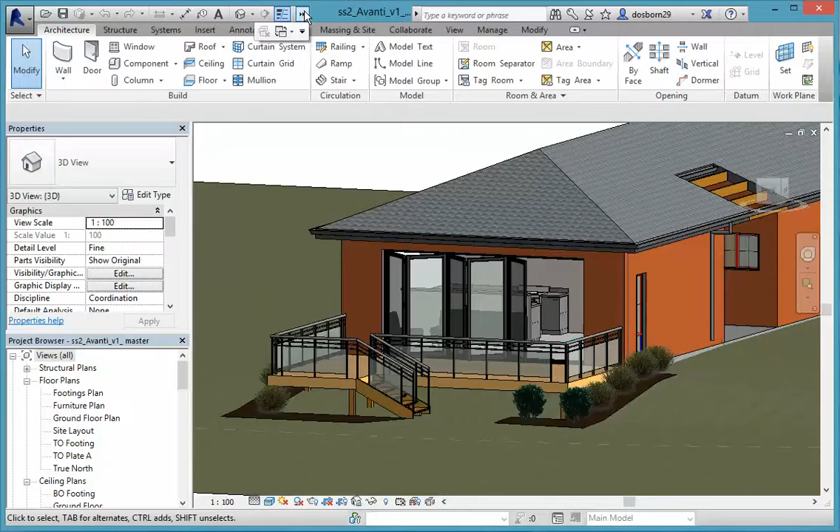Okay, let's go over to our original drawing.

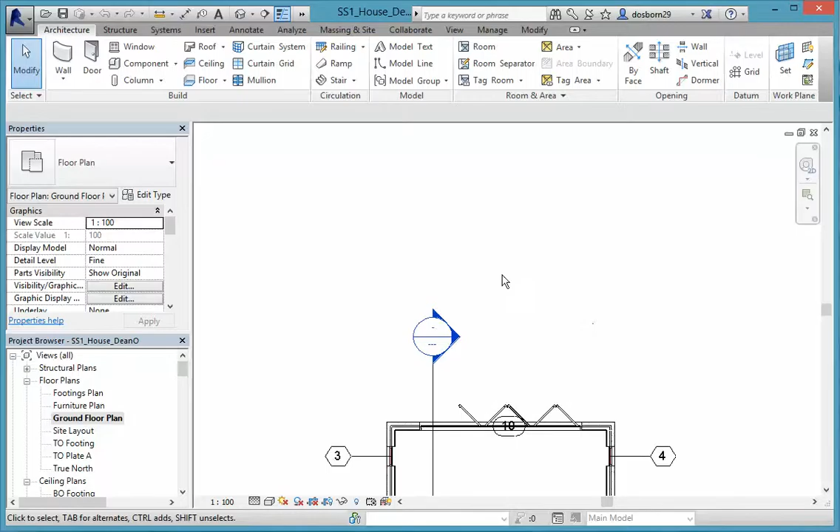First thing we're going to do is put in our floor. Come into our ground floor plan. I'm going to zoom in on the area of the house that we're going to put it into. You'll need to have your drawings out from the original or the finished house so that you can get your measurements off of there. The decking itself is exactly like putting in a floor.

So I'm coming over to floor, selecting floor, pull down, and there should be one there called decking wood finish. Just make sure your level is ground floor and there's no offset. You notice we have the modify and create floor boundary as usual.

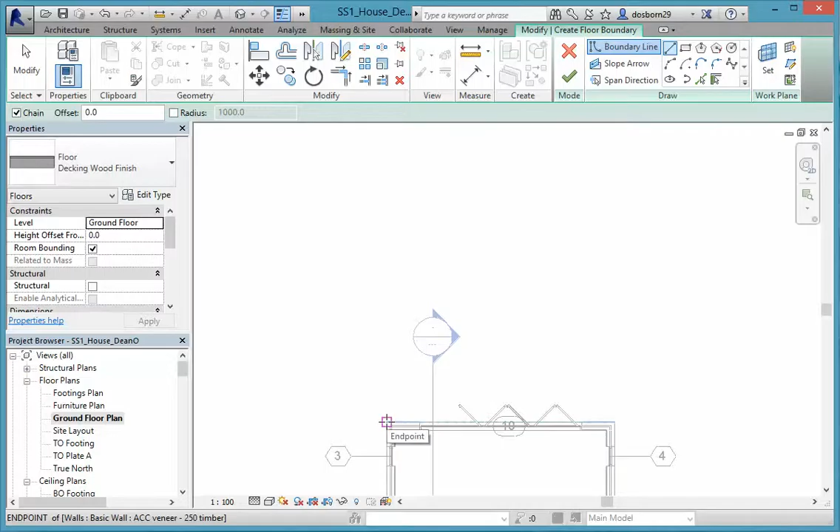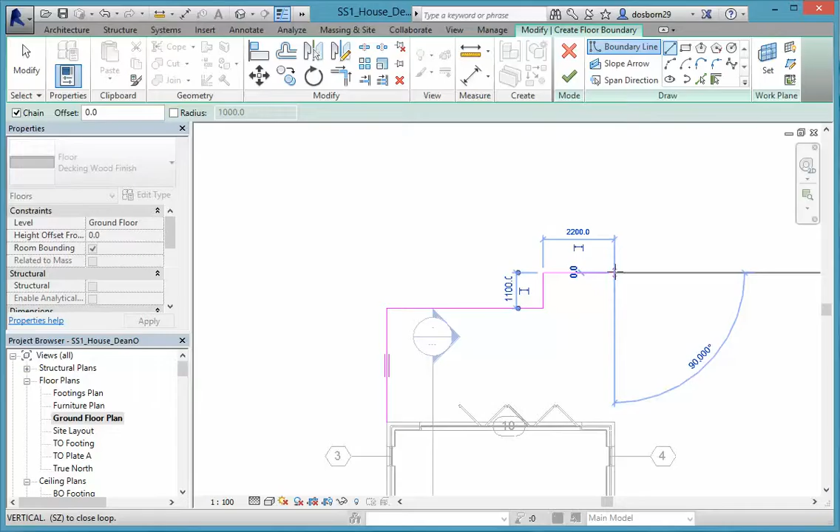Come in, select line, and working off your drawing, I'm going to start from this corner here and type in these measurements. So we've got 3500, enter. We're coming across 4800. We're going up 1.1 - I can probably do that just by using the numbers - and coming across till we line up with the end of that, you can see that dashed line, so that's 2200. That's correct. Down again, and don't forget you have to finish it off, so we've got to come across the back of the house there to finish it off. Escape a couple of times. If that's looking good for you, give it a tick.

We'll just have a quick look at that in 3D to see what it's looking like. We'll just spin that around. You can see we've got our decking sitting out there in the middle of nowhere really at the moment, but it is level with the floor inside, so that's what we're after.

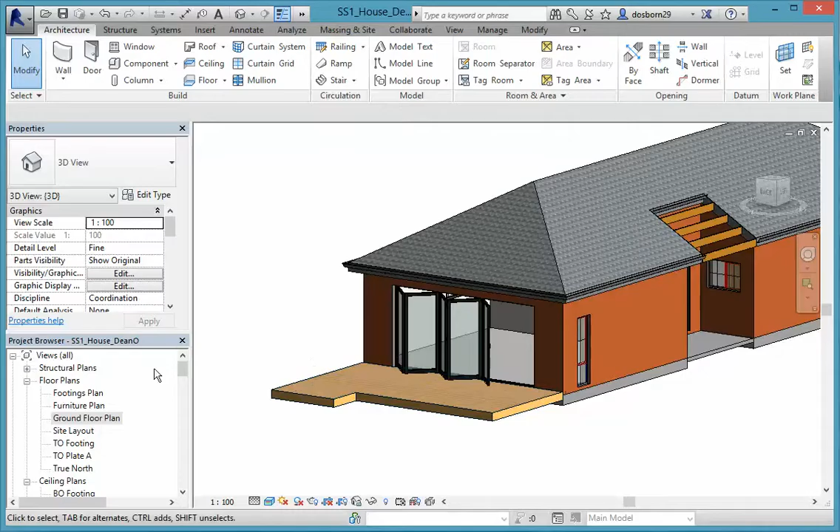Okay, we'll come back into the footings plan, and at the moment we can't see anything in there because we're below that decking. But what we want to do is set up for our timber posts and also for our round concrete foundations around those posts. The way that we would do that is to make up a grid, because columns actually will latch onto a grid, and it makes it a lot easier to lay things out once you've got it set up.

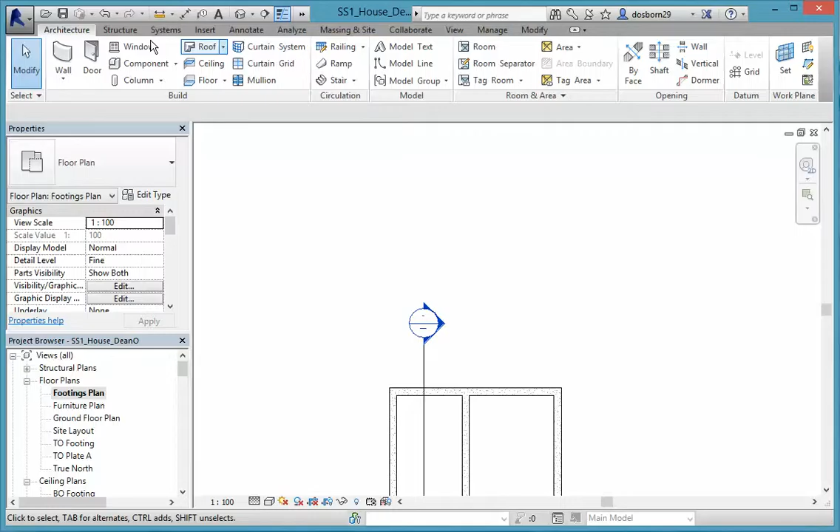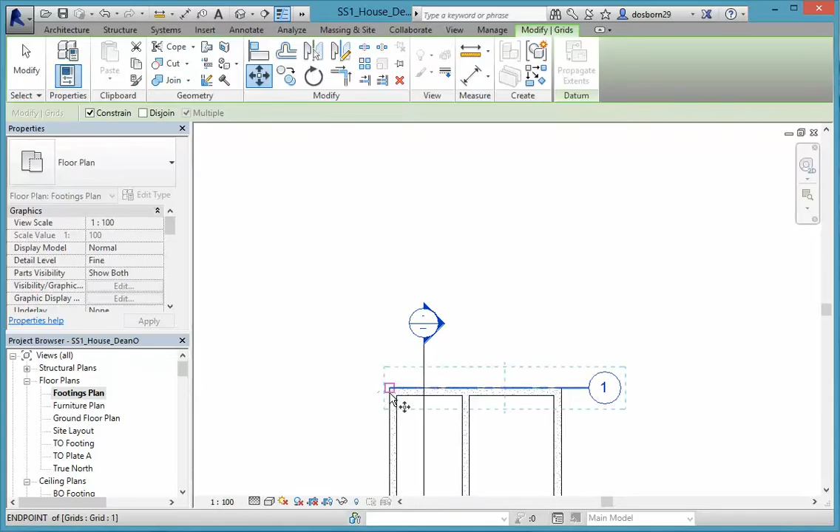So in your architect ribbon, come along to grid. We've put our first grid in, and we've got to work from one point somewhere, so we'll start from this point here, and we'll actually have to move this first grid line once we get it in place. I'm just going to left click on there, come across, you get a little number 1 there, then hit escape twice, select it again, move. Now I can select a point to move from, and I want to make that 150 up, and enter, and now we've got that 150 up.

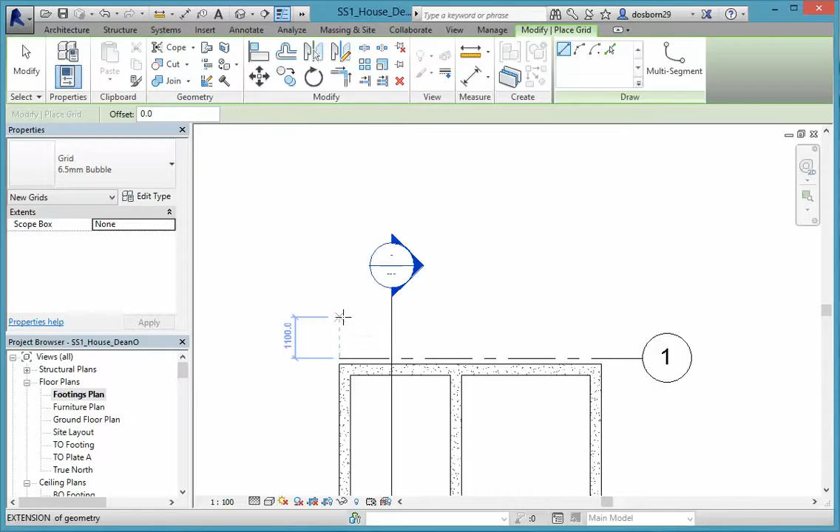Hit escape a couple of times, select it again, right click on it and create similar. Now our next one up from there is 1100. So I'm just going to type that in, 1100, and enter, then drag that one across, and you'll see how it lines up with the number 1 there.

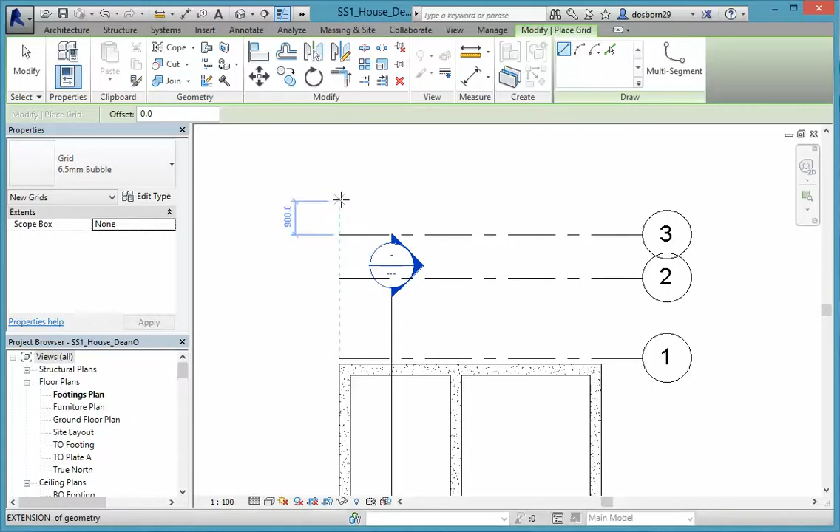Now the next one after that is 150. So we'll select that, create similar, come up here, 150, and enter. Drag that across. Now these intersect, but don't worry about that, just line them up. And we've got one more, which is going to be create similar, and this one's going to be 900. Bring that across as well, so it lines up. Hit escape a couple of times.

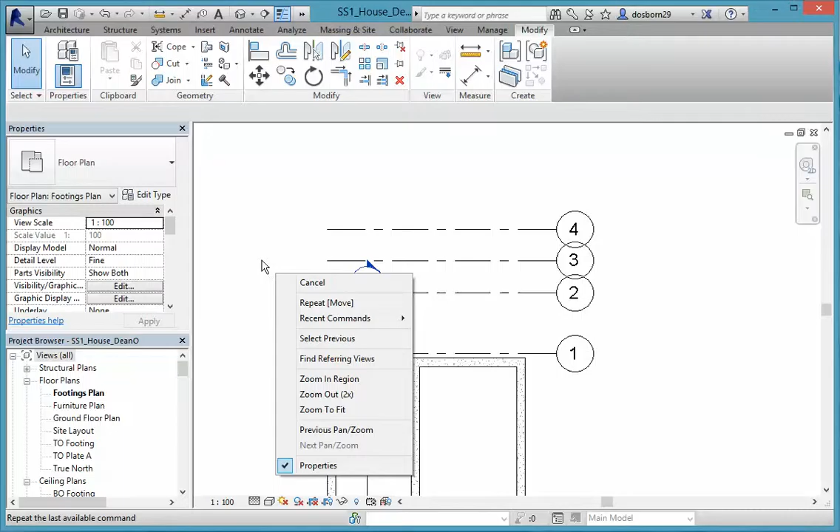Now we've got 4 going this way. We now need to put in 1, 2, 3, 4 going across this way as well. We'll start the same thing again. We'll go back into architecture, select grid. I'm going to start from this corner again, just here, and come up. Hit escape a couple of times.

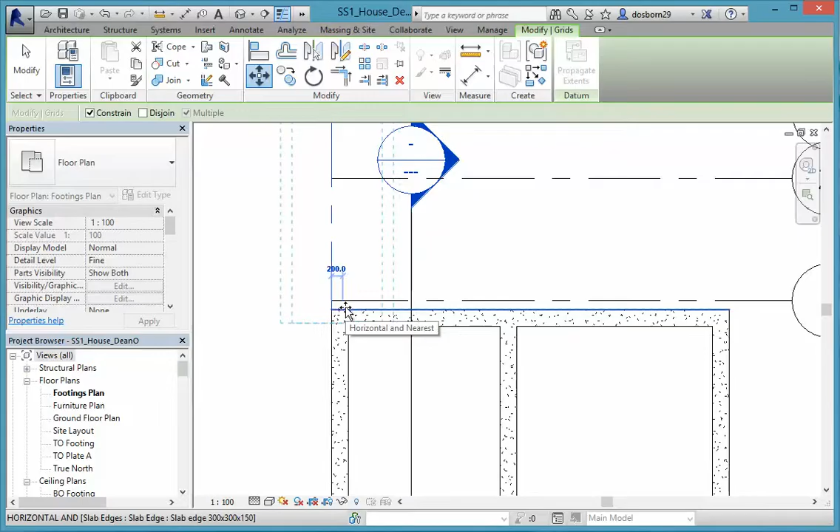Create similar. Sorry, we need to first move that one over 150. Forgot about that. So we'll just come over, come from the corner, and put in 150 and enter. Now we can create similar.

Hit escape a couple of times, select it, create similar, come across, and our first one is going to be 350, and enter. Again, drag that up till it lines up. Our next one, escape a couple of times, select it, create similar.

Our next one is going to be 1400, so we'll select it again, create similar, drag across 1400, up, and we've got one more to put in, which is going to be 1950 from this one here, so escape a couple of times, select it.

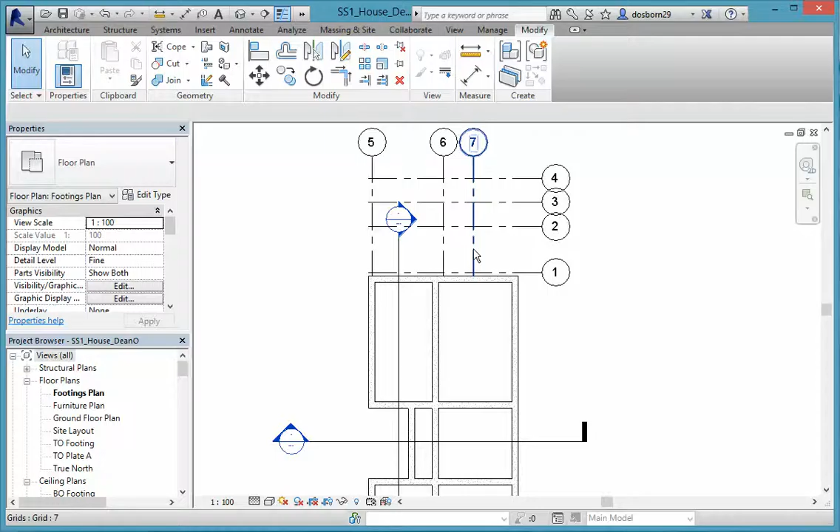Create similar, and we should be looking at 1950, enter, and up again to there. Okay, so we've got all our grids in, hit escape a couple of times.

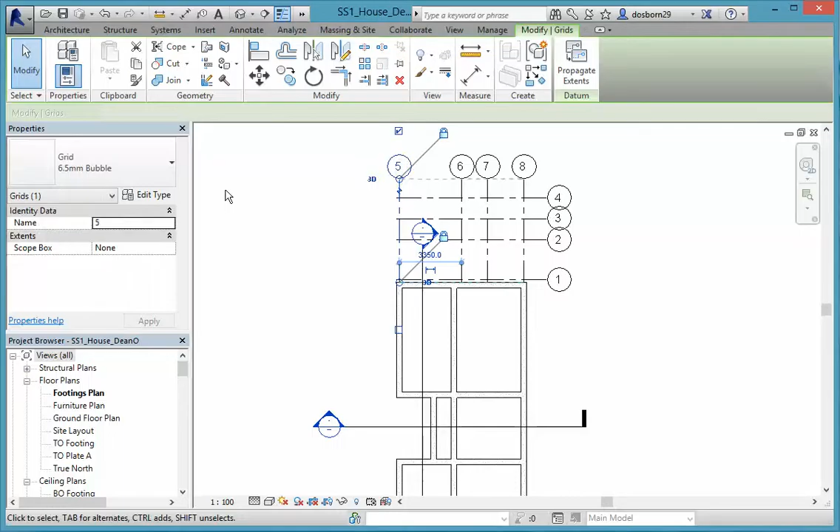Now you notice they're all numbers. We don't normally have them all numbers. We usually have one side being letters and one side being numbers, so that you can say grid point A4, just sort of like playing battleships when you're pointing something out to someone - you might be talking on the phone or something like that. So we'll change all these. There's a couple of ways you can change them. If you click on it and highlight it, you can come into this box here, and we're going to make these letters. Or you can just double click on that box and it will come up as well. So there's a couple of different ways that you can change that around. I'm just going to double click on them, just as easy as any.

Okay, and we have our grid for our foundations in place, so we can start to put those in now. We're going to do this in 2 parts, so I think I might wait to the next video to start showing you how to put the columns and the posts in. Get up to this stage and then go on to your next video to see how we actually use these to line up our columns and posts.